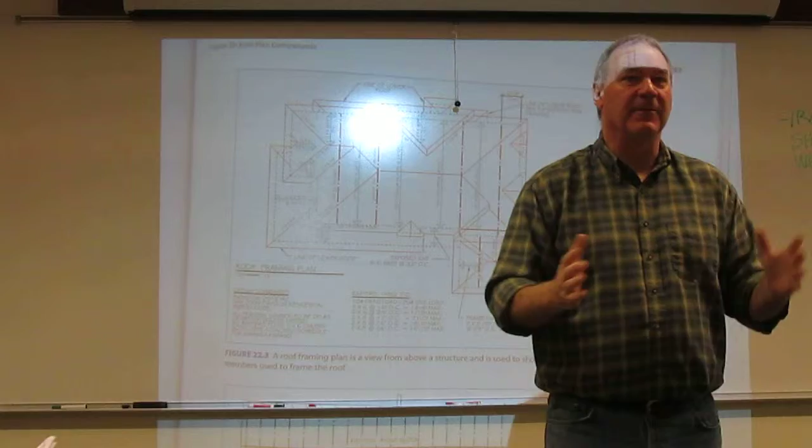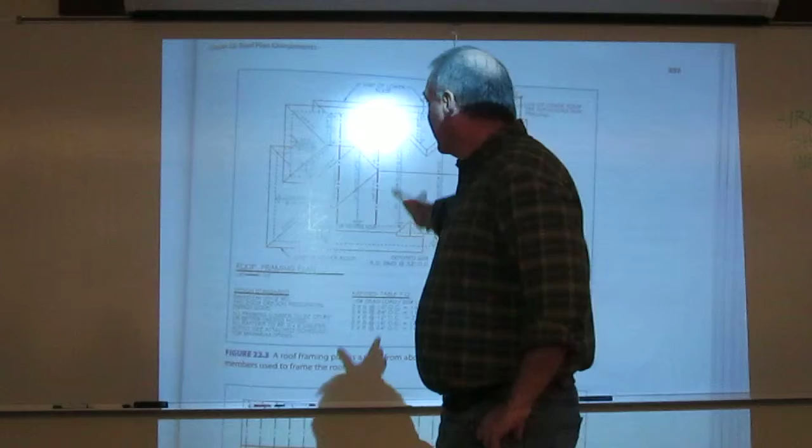So once we have the floor plan, then we want to go and start developing how our roof is going to be. Now the roof plan we're going to put together is going to look pretty much like this one. Okay? That's in your text. This is, I think, the second page, figure 22.3 of the chapter. Okay, so in essence, we're going to come in on this guy, and we won't finish it all today. I'm thinking that on Monday we'll try and tie it all together and get this done, but we'll get a long ways on it today.

I got asked this question this morning, I'll just throw it out there. We've been doing a lot of talking lately and not enough drawing. So I'm going to chop us off this morning and get us some draw time, because at some point in time, you know, we've got to be able to produce drawings and we need time to do that. So I'm going to try and make sure we don't go past like 9:30.

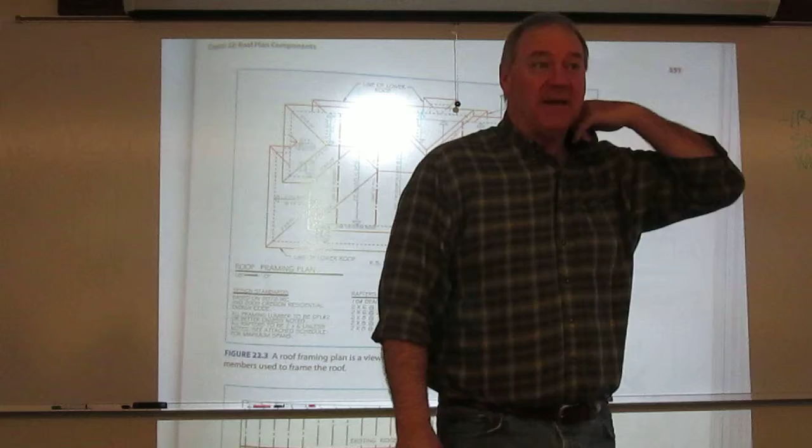So anyway, let's review this drawing. First, when we get ready to put together a drawing, we don't need to know this right off the bat, but we should have a stab. What scale are we going to go to? Okay, the text recommends an 1/8 inch, because most of this information we will give for the roof is not real small or detailed. Okay? Remember, this drawing is meant to be read by a truss designer.

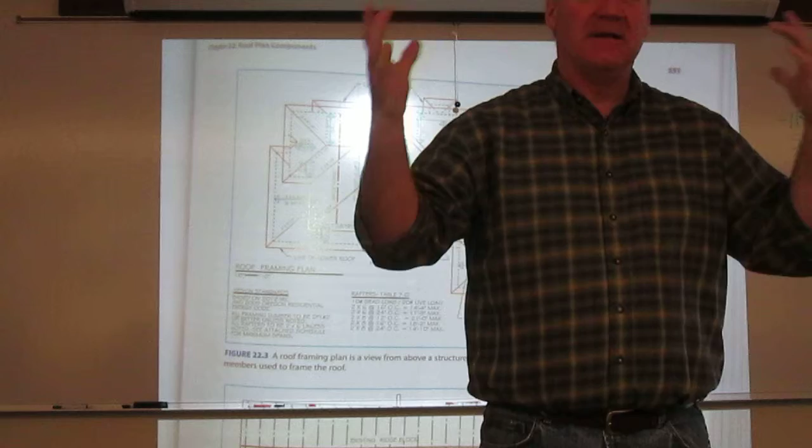Now, I think that having an 1/8 inch drawing just doesn't work well with the plan set for the most part. Okay? So like when we talked about this originally, don't hesitate to take this to a 1/4 inch. Now, do you need to? No, but you're helping the people visualize, right? If they're coming from a floor plan at a 1/4 inch, a foundation plan at a 1/4 inch, elevations at a 1/4 inch, and then all of a sudden they jump to a roof, they have a hard time making that spatial jump. Okay. So I wouldn't hesitate to go to a 1/4. In fact, I'm going to print mine at a 1/4, or at least that's the way I think I'm going to do it. Remember, you don't have to have that until you annotate.

Now, what we're going to do today is we're going to define our edges, ridges, and valleys. Okay, that's these big, thick, bold lines out here. Remember that these are very thick lines. So our border layer is set up with these properties. You may want to create another layer, call it roof, and give it a different color, but it should print 0.031 inches. Okay, that's totally up to you. I just use my border layer.

Okay. We also need these hidden lines on here that show the outside of our bearing for the roof. For us, that's what? It's our exterior walls. Now we do have one place that will be a little different, and that is we have a covered deck off the front. We haven't really put that roof on yet. We're going to start doing that today. And we will have something that's not an exterior wall carrying that roof, unless we can try and cantilever, which I think it's going to be too far out there to cantilever. So we will have these hidden lines on here. Our hidden layer works perfect for it, because they're hidden lines.

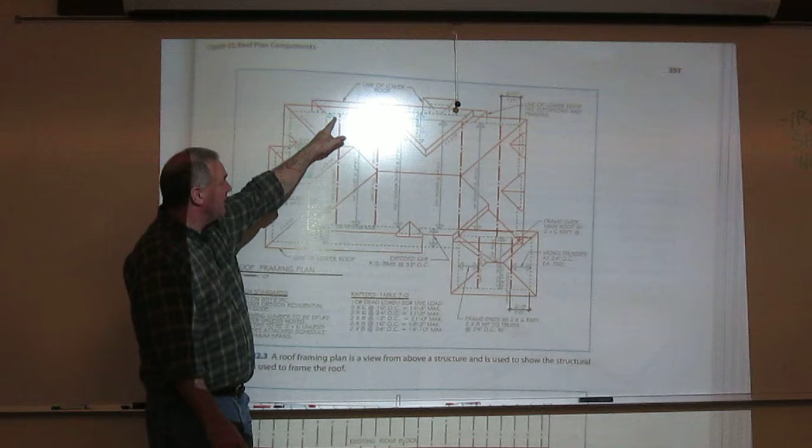Now we might want to create something different. We will have different truss zones. We are going to do a framing plan like this one is. Okay, now, for the most part, we have a vault or a scissor that occupies this part of the house, right? Over here. That's the living room, kitchen area. And I'm kind of visualizing the two houses as I look down on this. We have our center section, which has mostly a flat roof, right? Through our hallways, utility room, stairs, those areas.

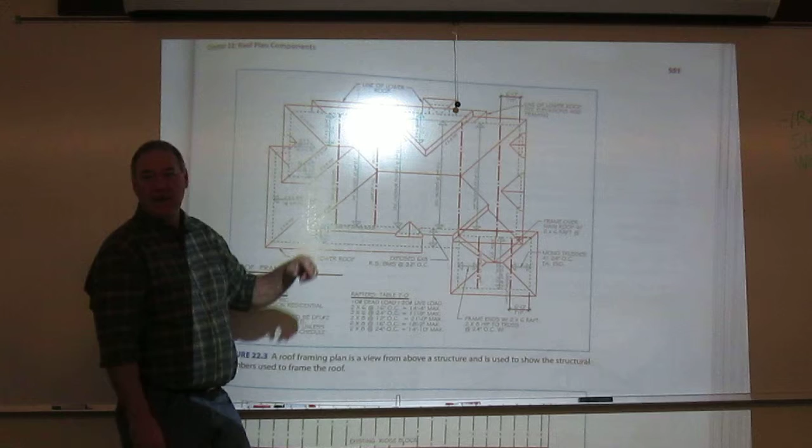And then we have another scissor section where we are vaulting over the master and going flat over the master supplemental rooms, closets, bathrooms, those types of things. Okay, so I kind of envision right now we have those three. We also have a garage sitting out here. That's probably just a standard gable. If you remember the sketch that the client gave you, they had a standard gable over that.

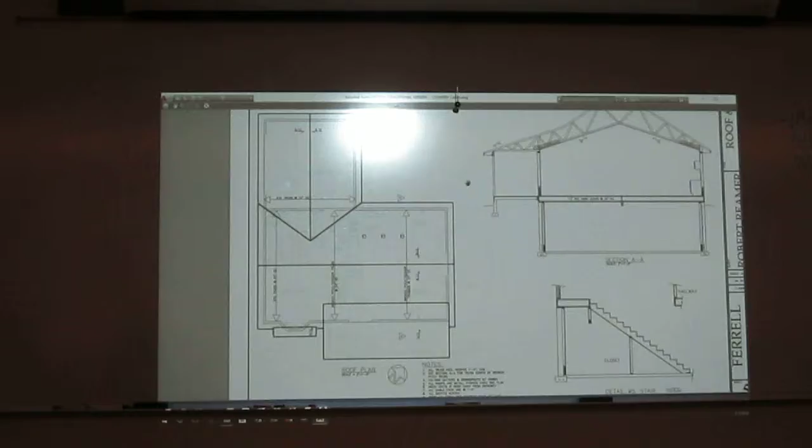All right, so that's, in essence, what we're doing. Now, I've gone ahead, I want to show you the finished product on this roof. So here is pretty close to most of your finished products and what you're going to look at. I think you can see that pretty well. So you have your edges, here's your garage, gable ridge, here's the valleys where it joins into this gable.

Okay, here we have a gable that stretches from here out over this. Here's the ridge line that runs the length of the house. Okay. And then here are the two sheds. We've got one over this little bump out. I know some of you don't have this bump out. You're not going to have this, but most of us do. And then we are going to cover this front deck, the front entryway, and that will be a shed type

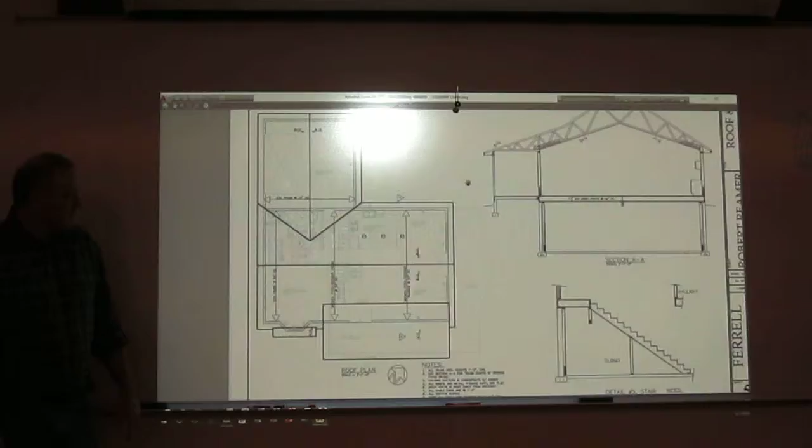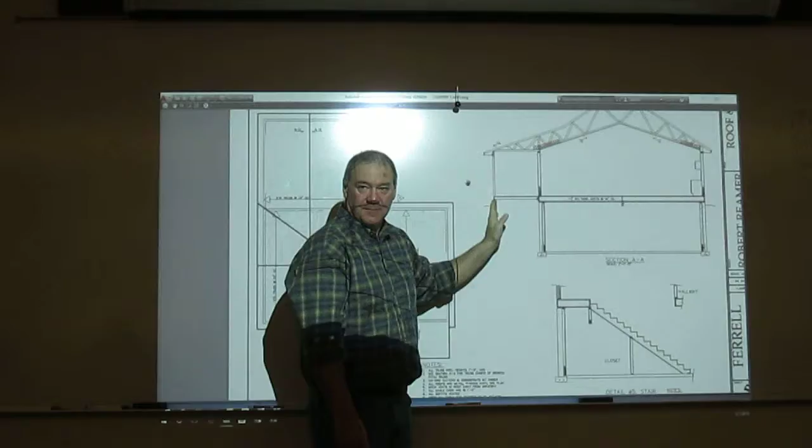of look. Now, I think on this structure, we can actually take these sheds and build them into the truss, like here. Okay. Now, we're gonna have to do some different supports out here, like right out here. This is the deck coming off the front, and we aren't gonna get to where we can really define this until we build our deck. Because then that will tell us where our columns are gonna go, we can put an eave on it, we can get everything correct. And so that might change how this thing projects just a little bit at that point.

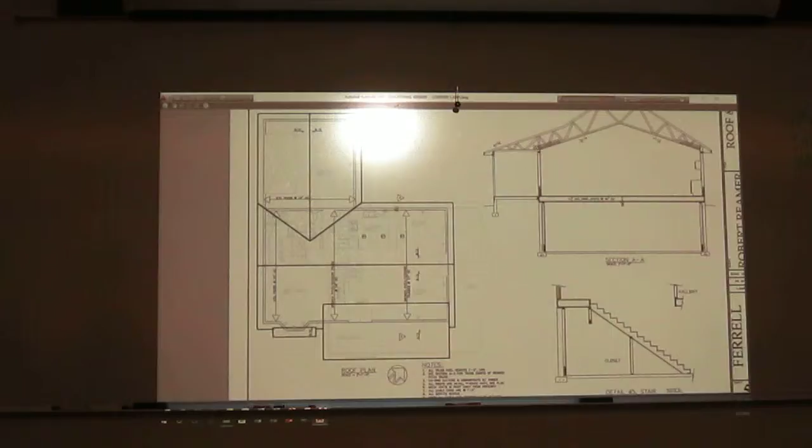Okay. So what I hope to do today is get this roof on, show the bearing of it, start breaking up my different areas for later addition. Okay. Any questions on where we're going? Okay, well, let's jump to it then. We do want to kind of go back and forth with our elevations, because that is going to tell us if we're right when we do this.

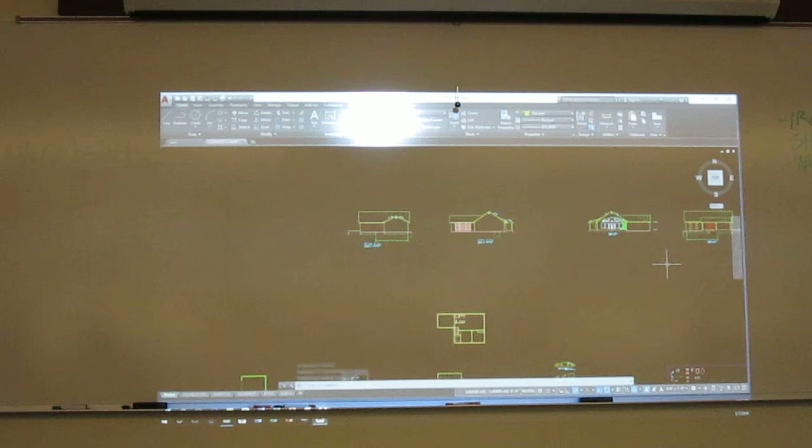Okay, so just real quickly, here I've got all these drawn, but where are my little guys? Okay, so right now we should have a couple elevations, maybe one, but here are my 4 elevations I've got. And let me show you the projection so you can see which sides I have. You're going to like how this works, because we used the glass box when we drew these, right? Because these are in essence my front, left, right, rear views.

Now when we set these up, one thing I kind of pointed out, you want to leave the ground line or the bottom and we just project it. Once I draw one, I do the other one, and I can project directly off of those. You want to make sure that lines up. So this bottom floor right here lines up with that floor, lines up with that floor. Okay. Do you need to take a second and make sure that's the case?

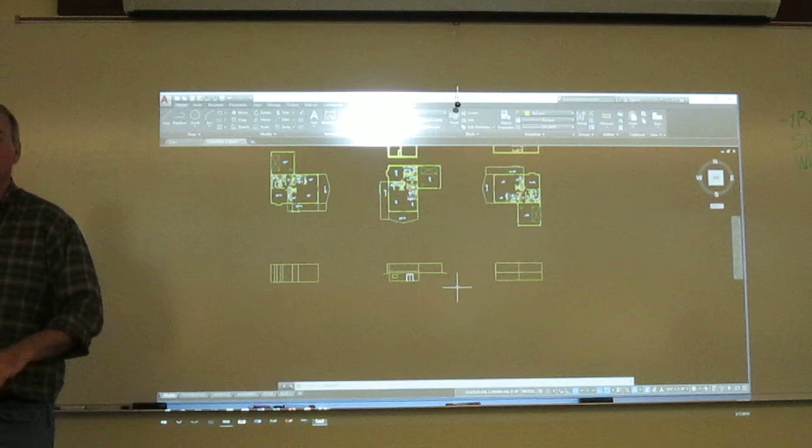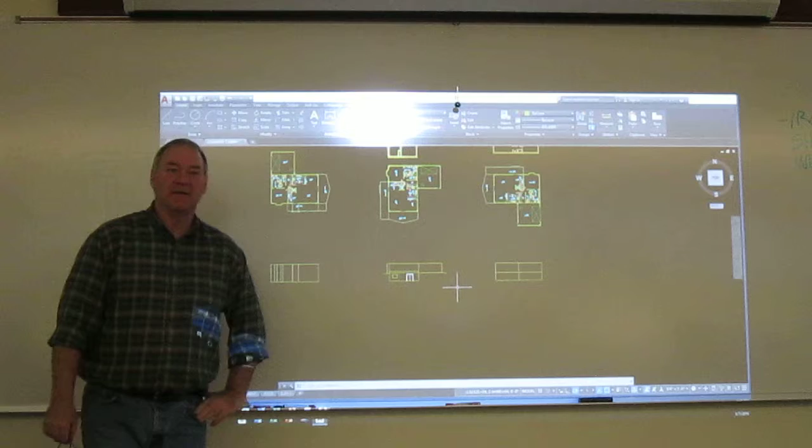How many of those do we need to have drawn for this? Today, just one. Okay. And I think you'll get the idea of what we're trying to do. I think we can build one roof off of this and get our heights and stuff. If you've got more, then that's fine too. But one, I think, is what we need. So you want to make sure they line up. So take one of these lines, either the finished ceiling, finished floor, and line them all up so that your Y dimension is the same throughout.

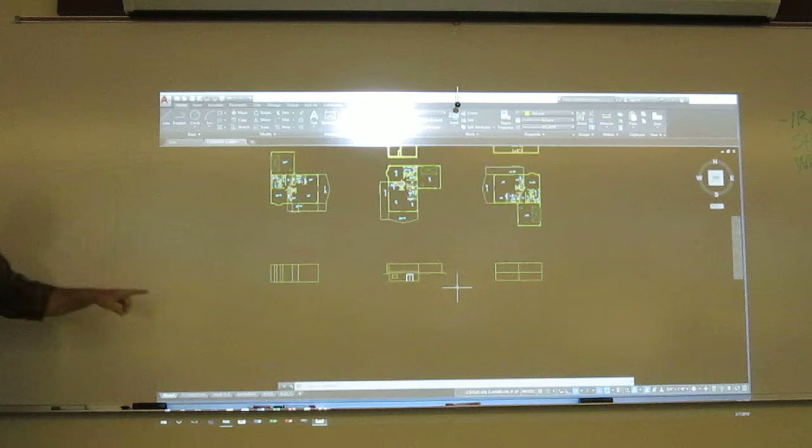Okay, we all okay? Can I move forward? Okay, all right, I'm going to assume I can. Now, the one thing that's nice about this is you'll notice on this elevation right here where I'm looking into the back of the house, this is where I'm going to see that peak, right? Over the top of the house. So when I get to draw on that, in essence what I'm going to have is a peak that I can show right here and draw it in. And we're going to build one of these today so you see how to do it.

Now, once I have that, and I come to a side view, I see the inclined plane over here, right? So it's going to come up something like this off the sides. How high does it come? Well, I've got it right here. I just project that over, okay? And there's where it sits. Okay, so once you draw one roof, you don't need to draw it in any other view. You'll be able to project from it to get all of these other heights.

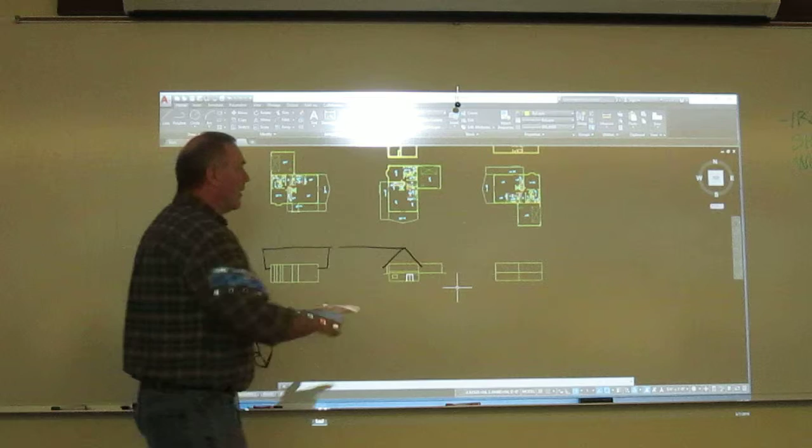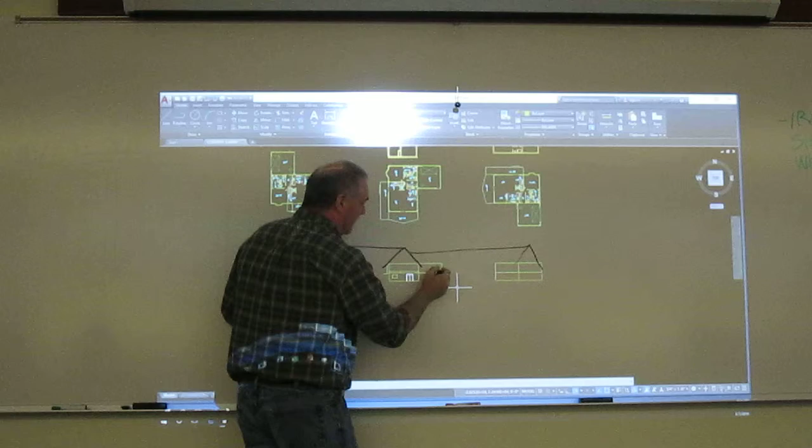Okay, I see my garage right here. Again, I'll come down here and draw this in, however it's going to be, and then I can project that everywhere. It's going to come in, it's going to show me where I meet this roof. It's going to show me all of these connections that I have. So that's why you'll kind of use these elevations.

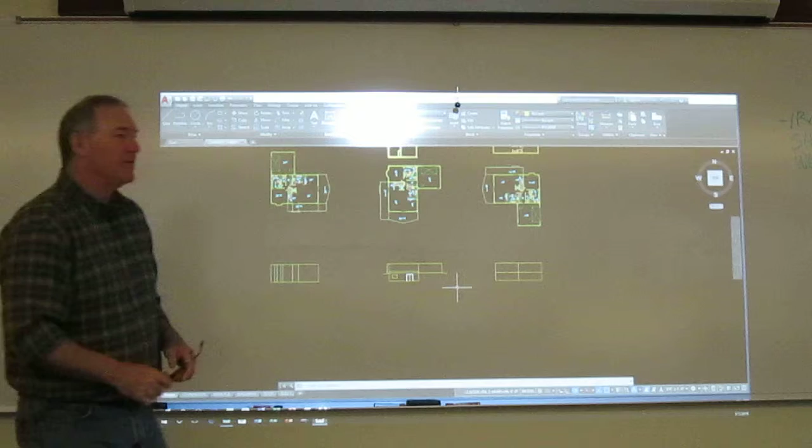Now, once we get those drawn and projected in the elevations, we can then take those dimensions and go to our roof plan and say, does it really intersect here? And the two need to mesh, okay? Because they are really the same object, the same planes in different views. So in essence, we need to go back and forth with those. Okay, so we'll get to that here hopefully this morning.

All right, to start the roof plan. In essence, what you need is the outside of your bearing. Where do we have that already? Let's take advantage of CAD. Do we need to draw this? No. What is it, Lisa? We have a basic rectangle of our floor plan. There it is, right here. This outside line around your floor plan. That's your outside of the bearing. We almost always in the residential try and not put interior bearing. We already talked about that because then you can't remodel the space, right?

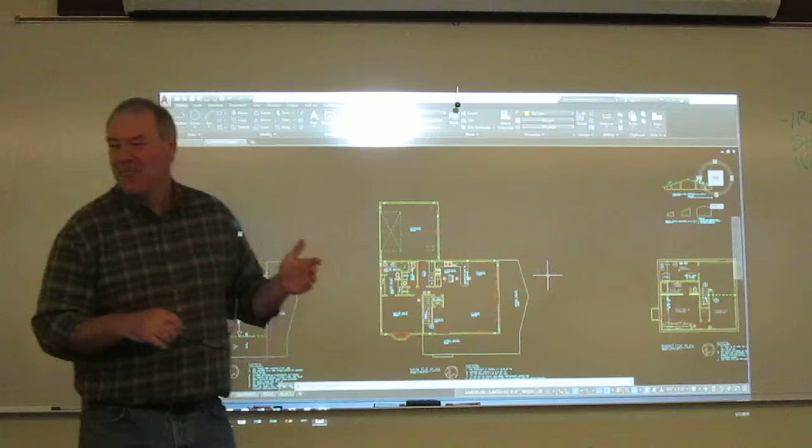All right, so what you want to do, and now some people take the whole wall, and you're welcome to take the whole wall. In fact, I do. Here's my roof plan. You can kind of see I've got the whole wall width. But you really only have to have the outside line. So let's go in here, and I'll use the copy command, and I'm going to come around and grab my outside line all the way around the house.

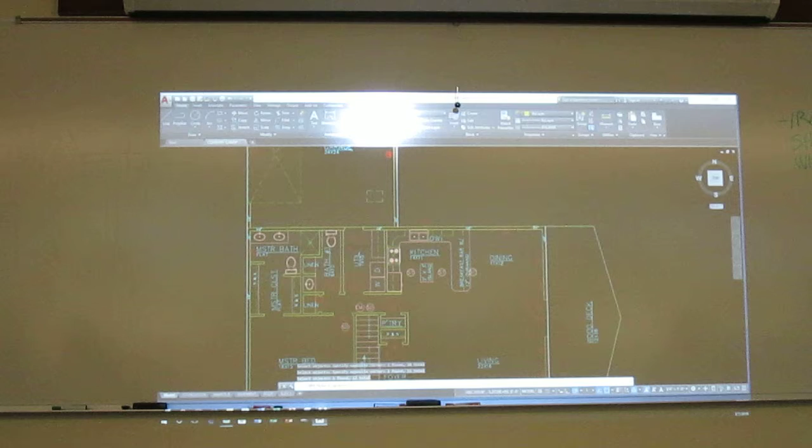Now, I think you're going to want that front deck also, so you might as well bring it with you, because we're going to need it going down the road. All right, and I'm just going to copy this off into some space. And put that on my hidden layer. Okay? So we're going to end up with something like this.

Can you see that okay? Should I switch that to a white color? What's that? I can see it, but it's pretty... Okay, well, let me switch the color on this stuff. You can see color 21 really well. Can you see? No, that doesn't look much better. I'll go back. You can see that probably the best, right?

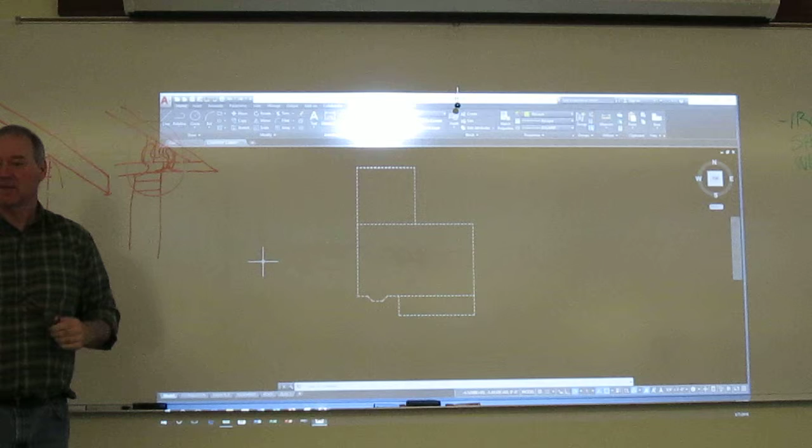This, in my opinion, is a preferred way to do it. Now, the problem with that is we're bumping that roof up in the air, and it's going to be a more dominant feature on how the house looks. So, which way do you guys want to go?

What is the height of that section above the column where the air comes through? Right here? This would be the bottom plate of the truss, and it's usually a 2x4. So what you're seeing here is 3.5 inches. Those are like 18 inches almost. Typically 1 foot is what we need, because we're going to have 10 inches of insulation in there minimum by code, because we got to go to an R38, right?

That's 10 inches of blow-in. So if we give it a foot, then we get that 10 inches of insulation over it, and we still got 2 inches for bringing air through there. So most of the time I put in what I call a 1 foot energy heel. And that's what we call it. Now, a roofing term, heel height, is the distance from the bottom plate to the bottom of the top chord. That's what we call heel height.

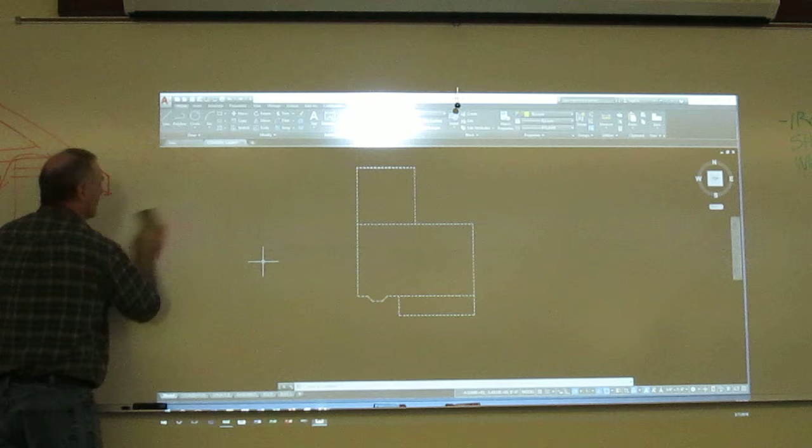Now, we'll get into that when we draw it. So we should probably do that, because that's most preferred. If you're going to design something for somebody, if they want efficiency, we should be doing that roof anyway. I believe so. It comes back to that whole LEED thing where I kind of said, you should build to it whether you're going to get LEED certified or not, because it's a more efficient way to build. And the performance of the building is better down the road, right? Yeah, LEED would give you a lot of points for that one right there, that I just erased.

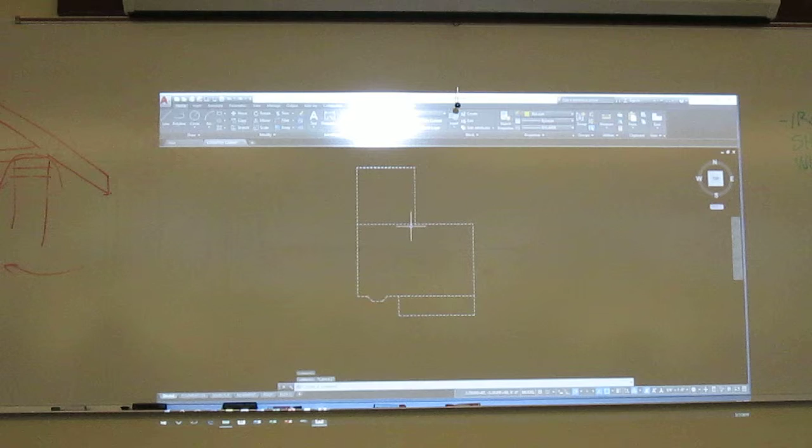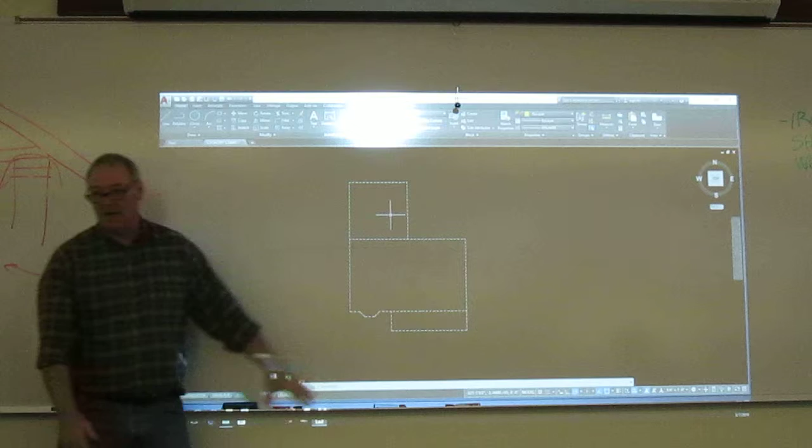All right, now that's not gonna affect this view, but let's figure we're gonna put a 1-foot energy heel on this thing. Now let's go ahead and put our gables on here. So first we wanna start with our big roofs. We've got a gable that runs this way on this roof. We're gonna put an 18-inch eave. So all we do is take this outside line, and we're gonna offset it out 18 inches all the way around. I'm gonna do an offset of 18, or 1 foot, 6 inches, and offset that out.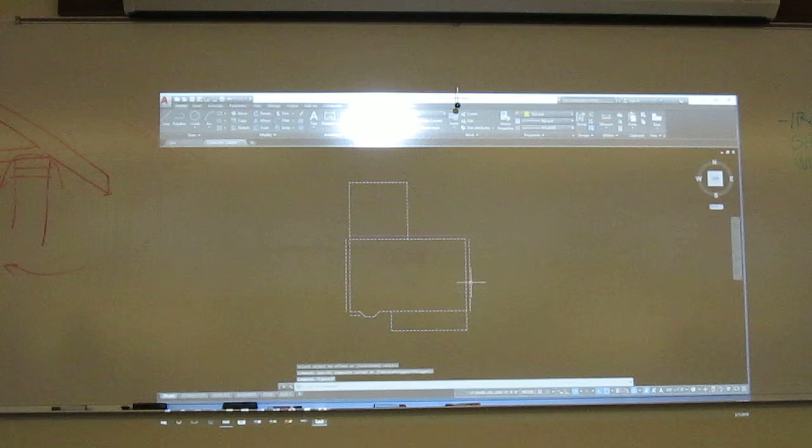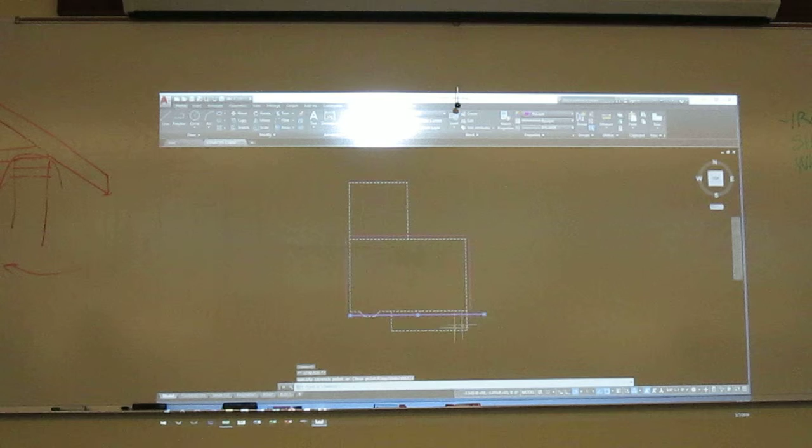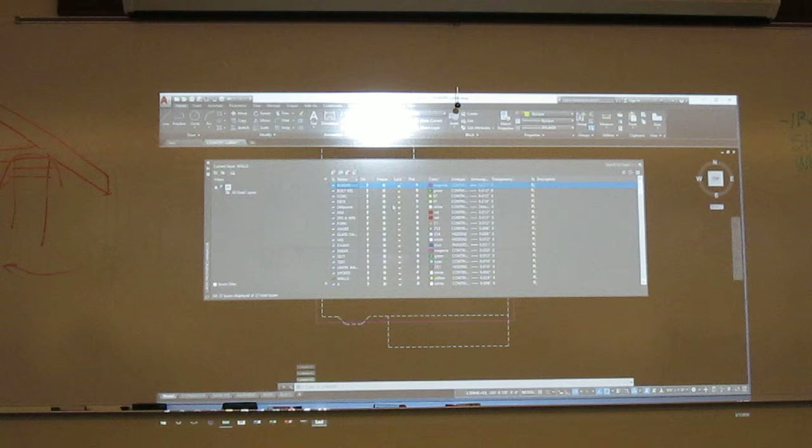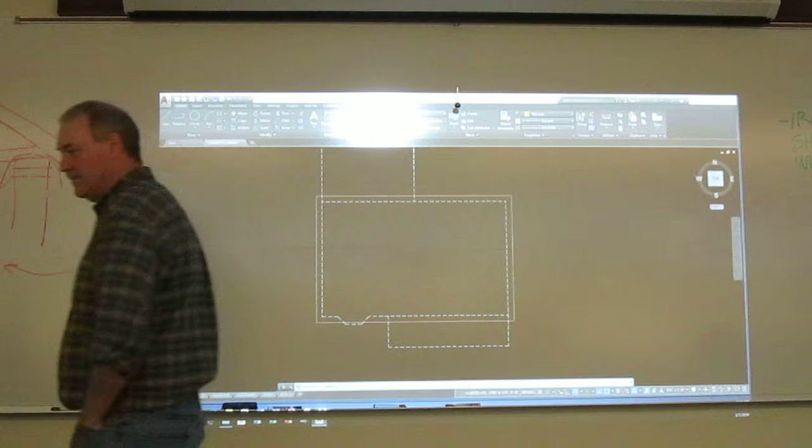Now, like I told you, I use the border layer for this. So you'll want to switch these lines to the border layer. And then take a moment, do a little bit of extending so that you've got a rectangle. And again, I don't know that you can really see that, so I'll change the color of my border layer. By the way, we're following the examples in chapter 23.

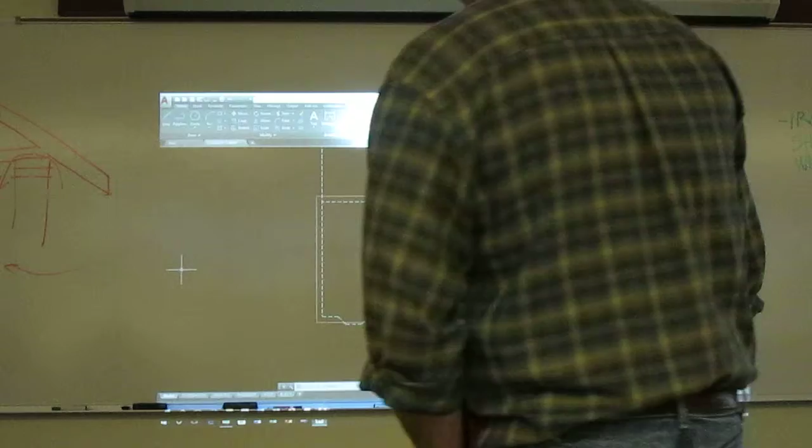Juan, you good? Cheryl, you good? Okay, move forward.

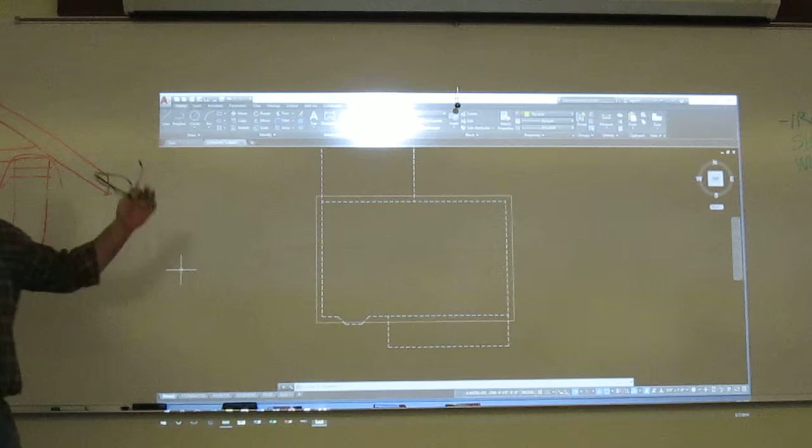Okay, so we're a gable, right? We in essence have two sheds that meet in the middle. They have a ridge line. We've now got the edge completed, we need to put the ridge line in. Where is the ridge line going to be? Directly in the middle. So let's go ahead and draw that in. And your midpoint snap works great on this. There's your first roof. We just built it. A little easier for us to build it than the guy stacking trusses. So you should have that line right in the middle.

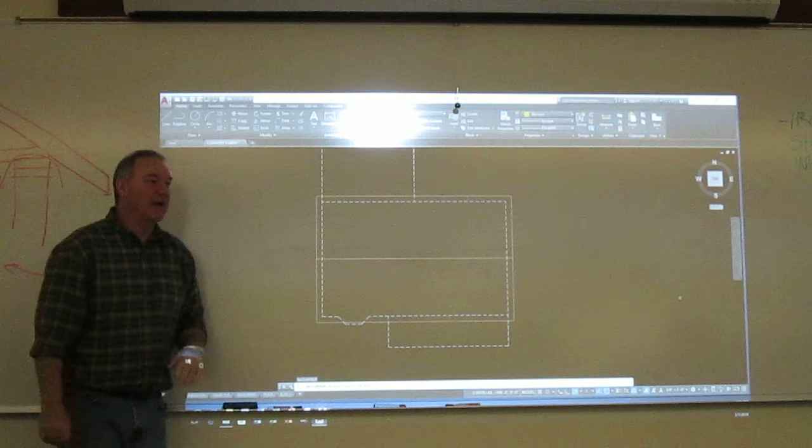Once you have that, let's now go to the garage and do the same thing. Now the garage is a 24 by 24 block, right? Does it matter if we have the gable ridge running this way or this way? And which way did your client ask for it to run? Your client asked for it running this way. Yeah. Let me throw this out there. What happens if I run it this way? Do I have any problems? All the water will run into the house.

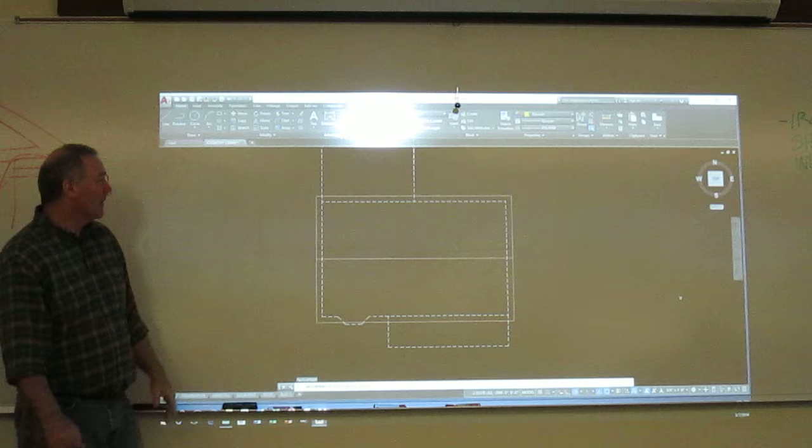Good, you guys are starting to visualize this in 3D then. Because if I've got a slope coming down and a slope coming down, things gotta fill with snow, I'm gonna get ice dams, I'm gonna do all kinds of weird things here, right? We would then have to put something like a cricket in to take care of that, which would be a false roof to shed that water. So yeah, we're gonna switch it this way, that way we do not create a valley in there that can hold water and ice.

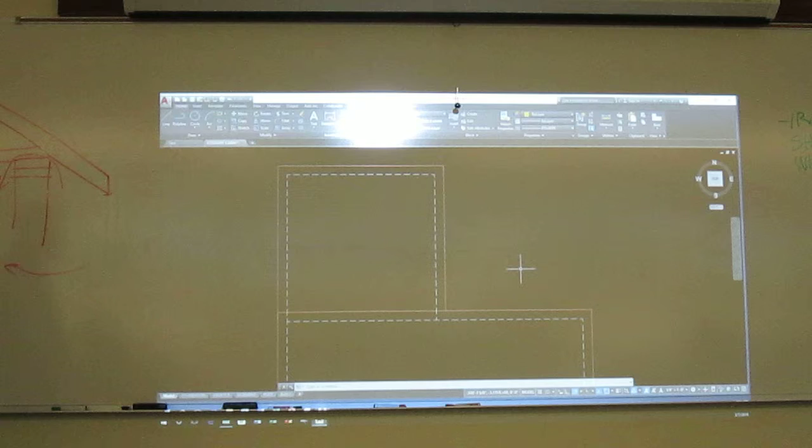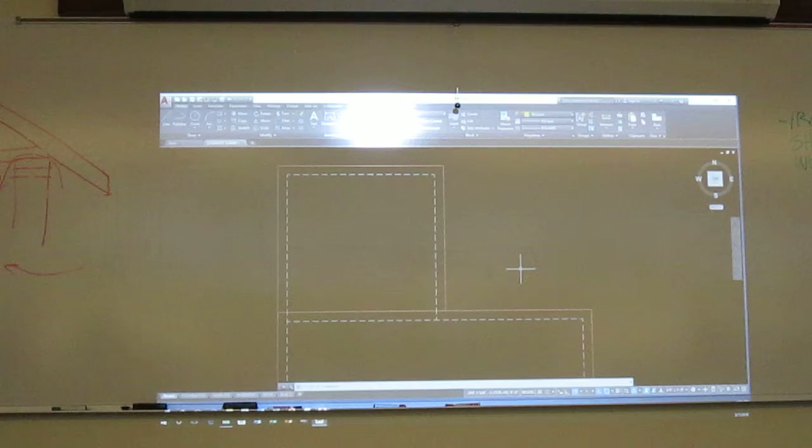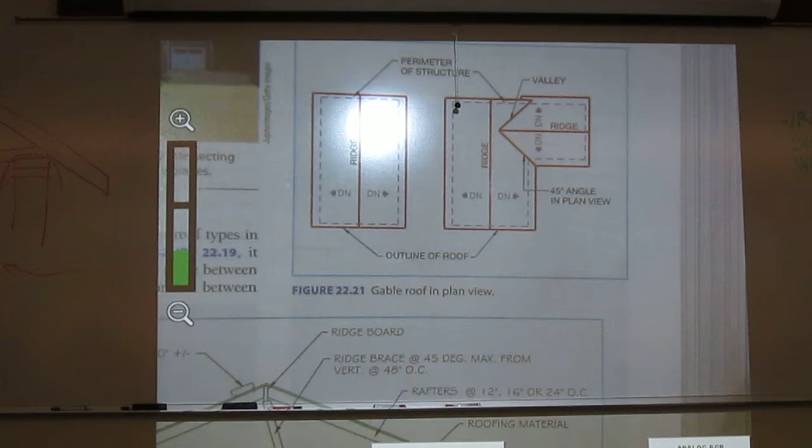Okay, so again, you're doing your 18-inch. Now you only have to do 3 sides here. So I'll do my offset of 18, and I'm doing these 3 sides right here. And then join them all together, so you get another rectangle. Okay, so is it okay to move forward? So I'm in your text figure 22-21 where they give us the bird's eye view, or the